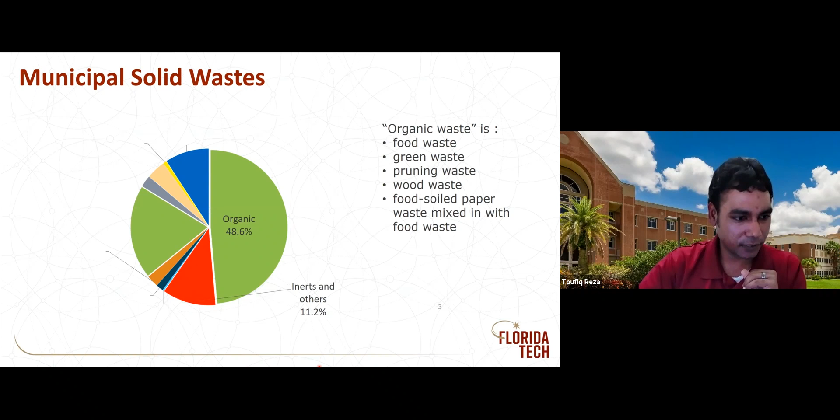The problem with municipal solid waste is it's heterogeneous. Think about it, my household waste from this week will be different than next week. When we're collecting it, it's very heterogeneous. An industry cannot be built based on a very heterogeneous, changing substance.

It has to be something consistent so we get a consistent product. It often comes with high water content. Usually municipal solid waste has poor mechanical dewaterability, high ash content, low bulk density, low friability—we'll come back to those later. It's also usually contaminated with organic and inorganic contaminants.

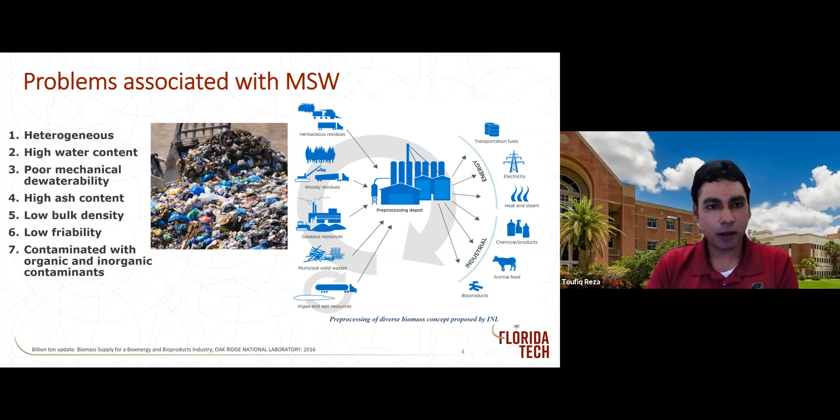Because it's heterogeneous, it's very difficult to have one solution for everything. There's no single process that solves all the municipal solid waste problems. Our approach is one way to go, but others are developing different ideas too. I'm not the only one working on municipal solid waste or organic waste—we've identified this as a serious problem, and many of us are proposing various solutions. This is just one solution we're proposing today.

So one solution: if I have municipal solid waste, companies like Republic Services or Waste Management truck it, and we can do something called the autoclave. These large-scale processes operate at 140 to 150 degrees Celsius, which melts the plastics and separates the large particles from the organic fractions.

The large particles can then go to the MRF, also known as Material Recovery Facility, where more than 300 of them operate in the US. Basically, they separate the recyclables—recyclable plastics, glasses, and papers—so we can recycle and reuse them. But there is evidently an organic fraction remaining.

One way to handle the organic fraction is through anaerobic digestion. We can produce biogas, which in the US is carbon dioxide and methane. Then we capture the carbon dioxide to get renewable natural gas, which we can inject into the natural gas pipeline or utilize otherwise.

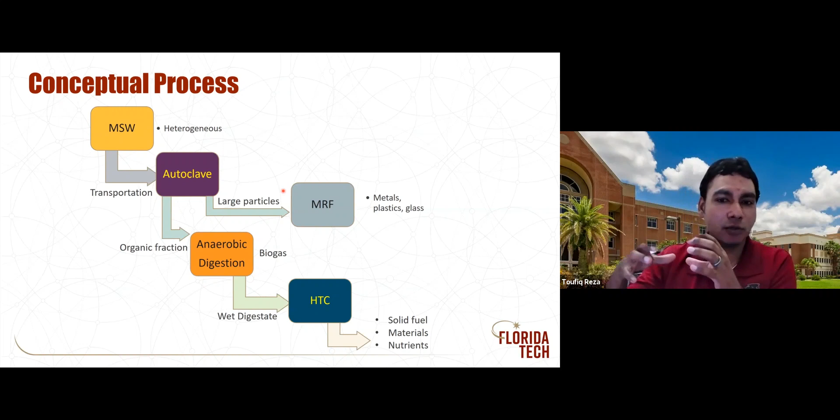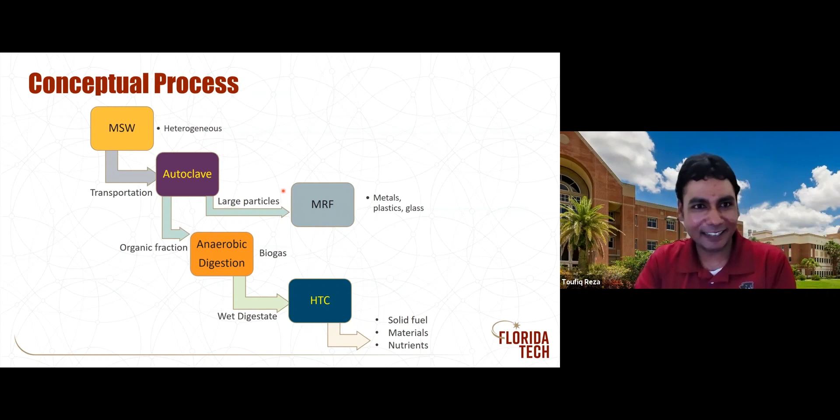I am not inventing the autoclave—it's already invented. Material recovery facilities already exist. Anaerobic digestion of organic waste has been established as well. So my research focuses on solving the last piece of the puzzle. I'll explain these processes a bit more and then introduce my research, starting with the steam autoclave.

So how it works is we bring the bags of municipal solid waste, and then it can go through a shredder if needed. The process I'm going to show you next doesn't actually need to go through a shredder. A shredder is a good idea to minimize the size, but it also adds to the cost.

Then it would go into an autoclave. Autoclaves usually run with saturated steam at pressure around 10 bars, and temperature about 140 to 150 degrees Celsius. After that, we collect the products, as you can see here, and the water vaporizes because it's 150 degree Celsius product coming out. Then we separate it into two fractions, and from there we can use the different products for different applications.

I just got off a phone with Hughes Energy Group last week, and based on UK technology, they are building 13 new autoclave plants in the US. They're already building one in New York City, and plan to expand to more than 50 in this decade. That is going to happen. We're going to see a lot of these autoclave facilities coming in, and this would allow us to reduce the load from landfills and utilize this material for other applications.

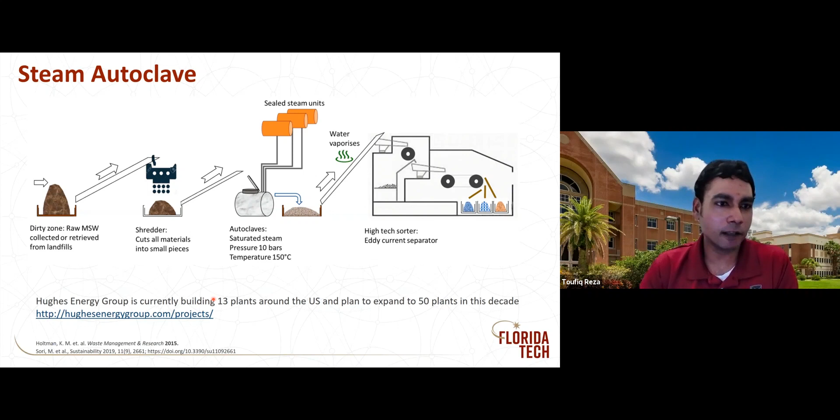So this is one process that is located at a pilot plant in the Department of Agricultural Research Station up at the West Coast, in the western areas, and this is a pilot scale. As you can see, the trash is coming in, and then it goes through an autoclave, and this is what the slurry looks like after the autoclave. It doesn't look that pretty, but...

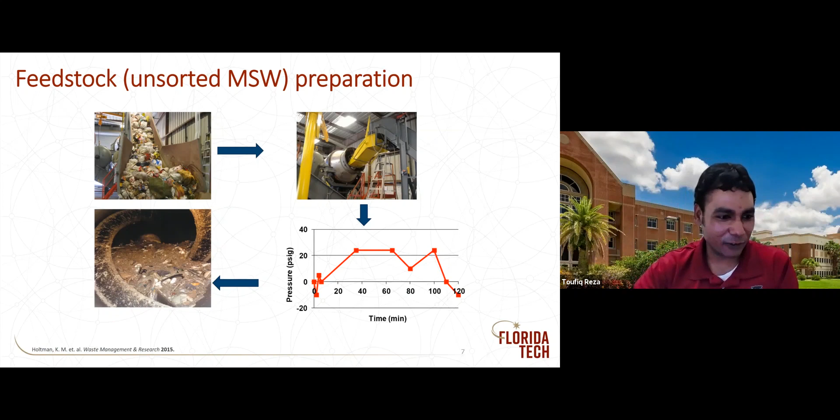...the product is amazing. If you look into the product, they collect it in two different fractions. You have a biogenic fraction, which they call MSW pulp, and we work with that as well. And this is a non-biogenic fraction, which as you can see has a lot of metals, plastics, papers, etc. So we could actually utilize it for the MRF.

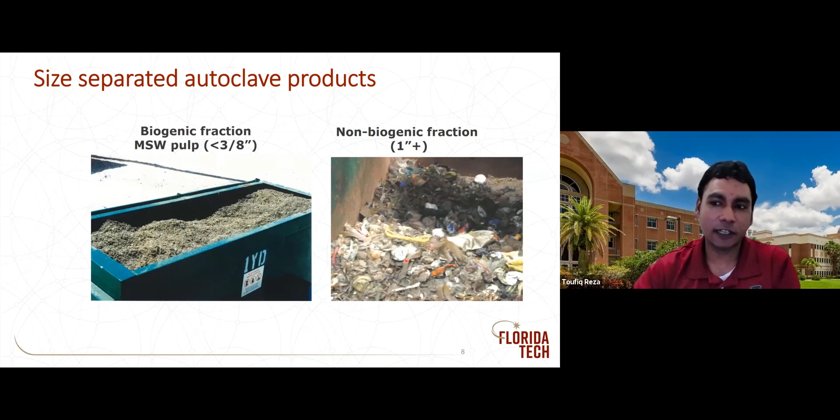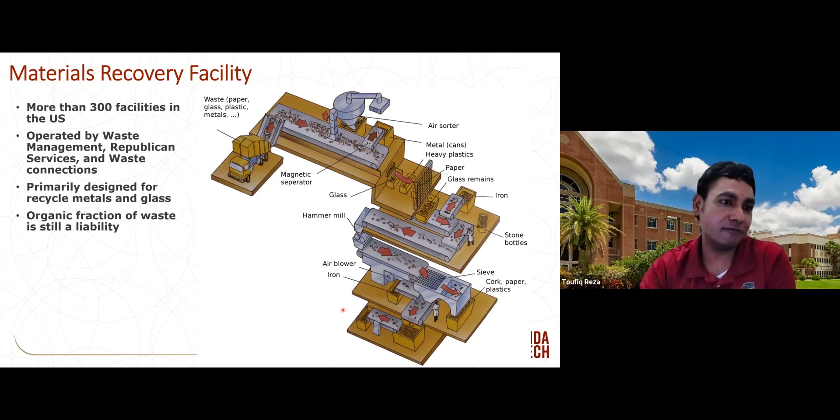But now what should we do with the pulp? We could try to sell it, whether to Georgia Pacific, so they can make paper towels or tissue paper out of it, or we can use it for other purposes. For example, we propose to use it for anaerobic digestion.

If you're not familiar with anaerobic digestion, it's a very good process to break down organic substances. This is a biological breakdown, with a maximum temperature of about 37 to 55 degrees Celsius depending on the feedstock, breaking down the carbon into methane and carbon dioxide.

The basic principle of anaerobic digestion is here. We have complex organic matter, and first we break down that organic matter. If you think about sugar, a glucose, we break down the sugar into acid. This process is called acidogenesis, where we make volatile fatty acids, for example acetic acid.

Then we go through acetogenesis, where these acids form, and then it goes through methanogenesis, where different kinds of bacteria convert the acids into methane and carbon dioxide. So depending on what kind of feedstock and how much carbon we have, we can produce methane and carbon dioxide. I'm not going to show you the results today.

We're still working on it, but we are trying to look for a way to capture carbon dioxide from biogas, so we have carbon capture from the biogas. Also, we have renewable natural gas that can be used.

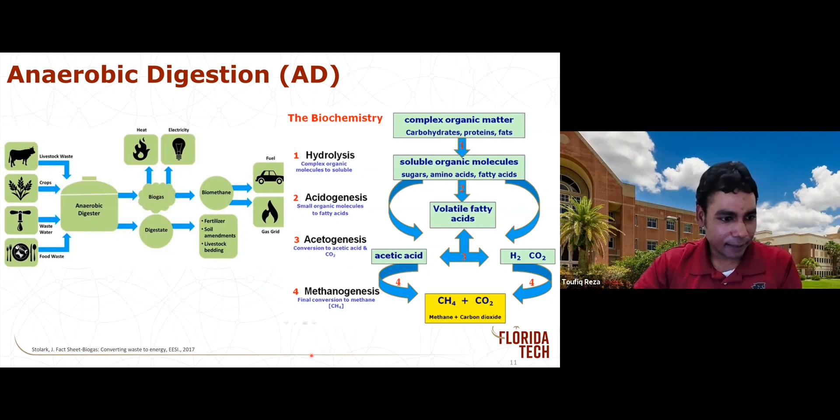So when we look into how the USDA pilot anaerobic digestion system works, as you see, we have the MSW pulp coming in, less than 3/8 inch grind, and then it goes into the receiving slope, then the reaction zone, and then the attached growth zone. This is how it looks.

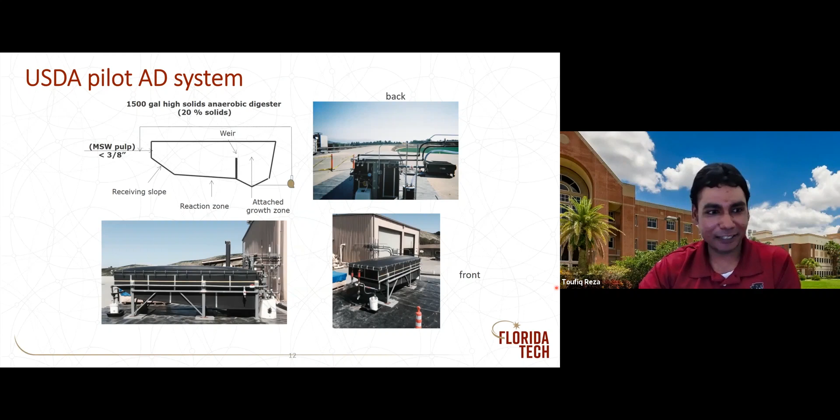It works great, and this is some of the results. This is Dr. Diana Franke—she was a postdoc at that time. Now she's left USDA and is working at a company in Atlanta. Anyway, this is what it looked like, and this is the solid product.

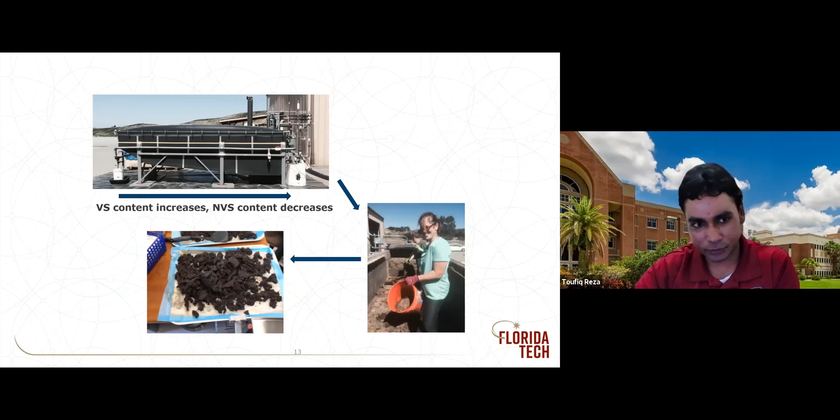So we're going to make biogas, and we can utilize it, but inevitably we are also going to make digestate. If we look into the mass and water balance—as chemical engineers, we love doing material and energy balance, it's our bread and butter—anything that comes in has to go out. So that's the thing when we look into the anaerobic digestion from USDA's pilot plant facility.

For 4,689 pounds of wet pulp, we need to add some water to facilitate pumping. We're going to have about 157,000 liters of methane, and another 40% would be carbon dioxide. But there would also be another 3,000 pounds of wet digestate.

And the USDA came to us and said, what can we do with the digestate? That brings us to the technology we're working on—what to do with the digestate. That's our hydrothermal carbonization process.

This is a little bit new, so I'm going to go a little deeper, because it is our process and I'm very proud of it. Also, it's probably a little new for many of you.

To look into hydrothermal processes, one thing we need to examine is water—specifically the thermodynamic properties of water at high temperature and high pressure. My good colleague at the University of Hohenheim, Dr. Andrea Kruse, wrote a great paper, 'Water as Magic Solvent for Biomass Conversion,' in 2015. I still refer to it.

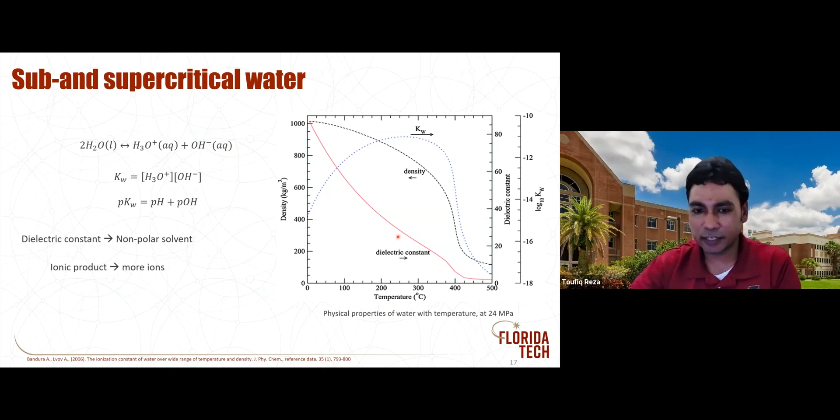We can just use water's property. We don't have to use any acids or bases or other harsh chemicals. We can just use temperature and pressure to convert this kind of wet feedstock into other materials. And this is what a hydrothermal carbonization process is about.

If we maintain our temperature between 180 to 260 degrees Celsius, we see a lot of carbon formation, a solid carbon formation. That's what we call hydrothermal carbonization, if my desired product is indeed the solid. But if we go beyond 260 degrees Celsius, but before the critical point, we start to see more of a liquid product. This is called hydrothermal liquefaction.

There are several technologies being developed around in Japan, in Europe, and in the US as well, where we are trying to hydrothermally liquefy solid waste, the sewage sludge, and try to upgrade that oil into a liquid fuel. In this case, we are going to say it is a sustainable aviation fuel, and it did work. I'm not going to go into that, this is another part of study. So we're going to focus on hydrothermal carbonization.

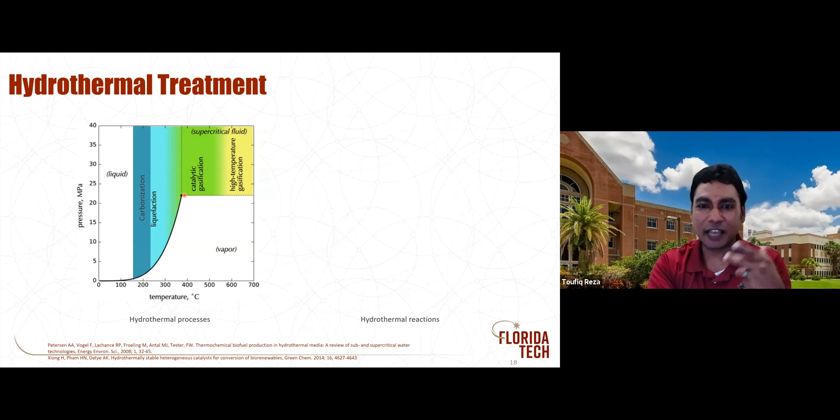So if your goal is to produce hydrogen, and if you are okay with 22.4 megapascal pressure and 400 degrees Celsius, the reaction is very quick, and it usually happens. But there are several issues. For example, at that supercritical condition, if you have any amount of halogens, it starts to corrode very, very quickly. So this is one thing we have found.

In terms of reactions, I'm going to skip it very quickly, but on the shaded side, we have the liquid and the vapor phase. If I have the vapor phase, I'm going to have gas phase reforming and pyrolysis that you might be more familiar with. But on the liquid side, I would have dehydration, hydrolysis, aqueous phase reforming, all the way to gasification.

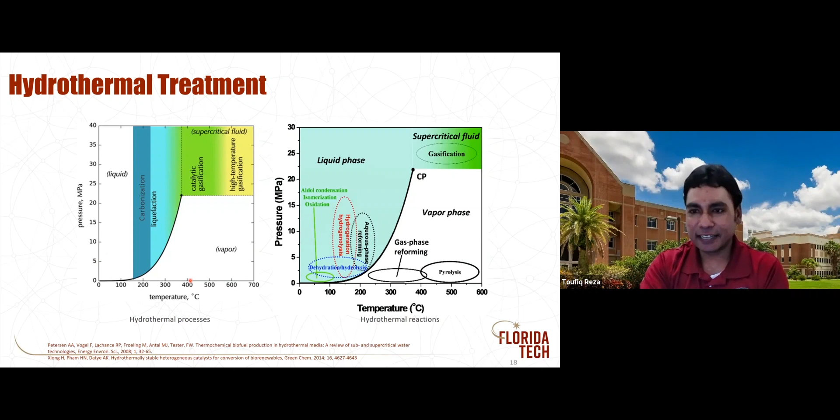Now, what are the advantages of hydrothermal carbonization if you're talking about a solid product? The hydrothermal carbonization is a wet process. We don't have to dry the biomass. This is very advantageous for us because usually this kind of wet waste can have more than 95% of water. Evaporating it or drying it off is an extremely energy intensive process. So we don't have to do that.

It can accept numerous biomass types, so we can have only one reactor setup, and then different biomass coming in. One of my research areas is what we call co-hydrothermal carbonization, where we actually blend different biomass together and see how they affect each other. It can also convert waste to energy and materials, and I'll try to cover both of them. Let's see how I do with the time.

It is a non-catalytic process. Water itself, because of its thermodynamic properties, we are going to utilize it. We don't have to use a catalytic process, but there are technologies nowadays being built as catalytic hydrothermal liquefaction or catalytic hydrothermal carbonization if we want to make a final product out of it. But there are other issues as well, like how to recycle the catalyst, how to regenerate the catalyst.

Depending on what we have, we found that the reaction is slightly exothermic. Now, it being slightly exothermic is a good thing. Too exothermic means, in chemical engineering, we call it a runaway reaction. Anything that is combustible, we have to design against that runaway reaction, make sure that everything is cooled down for process safety perspective. Slightly exothermic is good, meaning the reaction itself produces heat. So if we can make that process in such a way that we are utilizing the heat effectively, there is a possibility that we probably don't need to add additional heat when the process is running at a steady state.

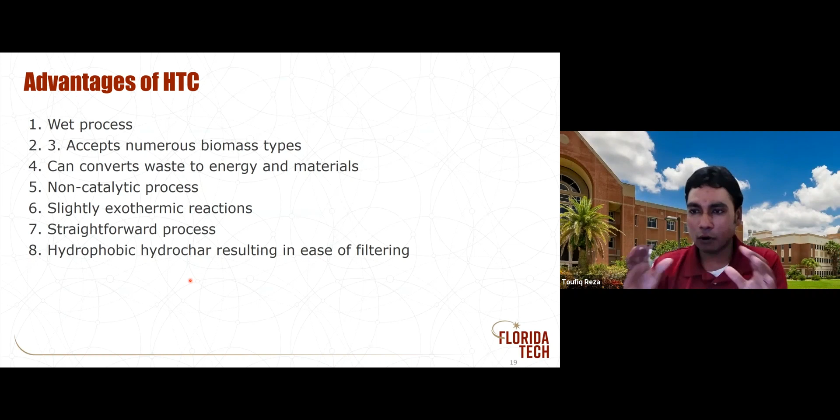Again, as I'm saying, this hydrothermal carbonization process is basically a pressure cooker. This is all I'm saying in a very technical way. It's a pressure cooker. You put everything in, like my meat and everything, put the lid on, have a weight to it, and then cook it. We know that pressure cooker cooks it faster, and I know why, because it is pressurized. So we just go beyond that.

We have a couple of fancy ones, if you can think of pressure cookers, which could go up until 500 degrees Celsius, 5,000 PSI. A little more robust, a little more controllable.

In terms of temperature, as we already talked about, it is about 180 to 260, 280 degrees Celsius. Depending on what we want, the residence time can vary from 1 minute to 12 hours. The higher the temperature, the lower the residence time. As you remember, the kinetics works in this way: the higher the temperature, the lower the residence time. And we do not add any pressure - this is an autogenous pressure during the reaction.

So we go through the biomass, in this case digestate, and biomass already has water. There are a couple of products coming out. There will be a solid char coming out - this is what we call the hydrochar. This is how it looks - it's black, it's dark. But there are some gases coming out too, probably around 5% of the carbon would convert to gas. One of the reactions for the hydrothermal reaction is decarboxylation, where we could see some carbon dioxide coming out. We'll have water and platform chemicals, in sugars and acids - that is another product or byproduct that we are looking into as well.

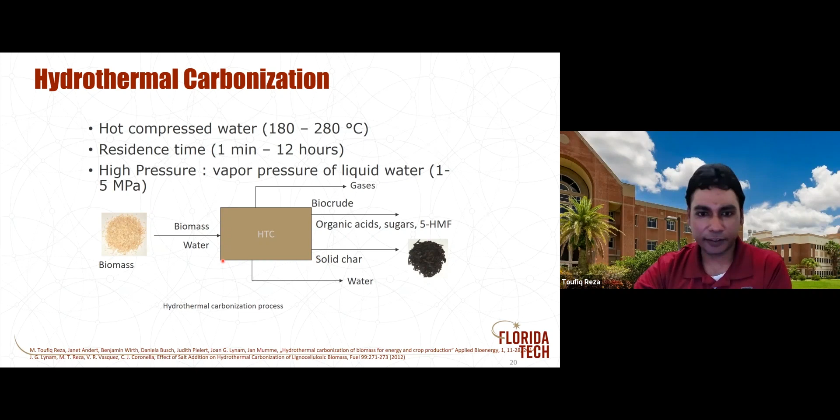I'm not going to spend too much time on it, but this is to construct this reaction mechanism. It cost us, several groups, more than 6 years to actually construct how it is happening. In a nutshell, the biomass would go into hydrolysis, where water will be consumed. It breaks it down into different monomers, which would then go into dehydration, and into a couple of other reactions we call condensation, polymerization, aromatization. In every case, we see some dehydration product coming out, and also some decarboxylation product coming out. So altogether, we start with the biomass, which ends up with a more carbonated, defined product.

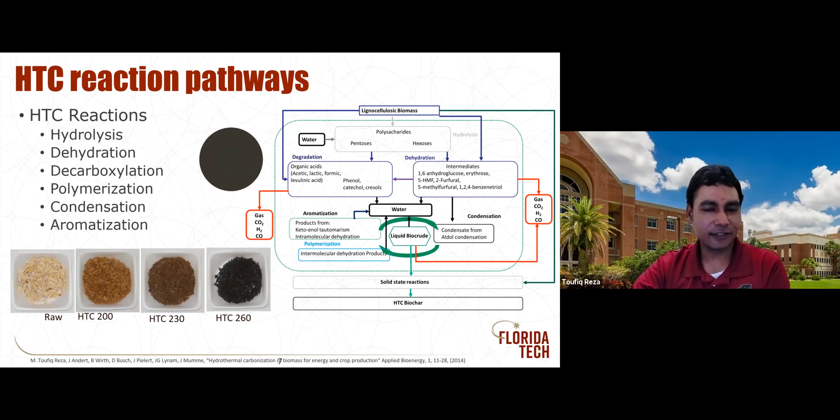If we look into hydrothermal char, this is how it would look chemically - we usually have a hydrophobic core, and a hydrophilic shell. The hydrophilic part has more functional groups. And when I see the material property or material application of this kind of solid char, the functionality is a very big factor. But in terms of fuel, I would need a lot of carbon and a lot of hydrogen, because those are the ones which would actually reflect my fuel value.

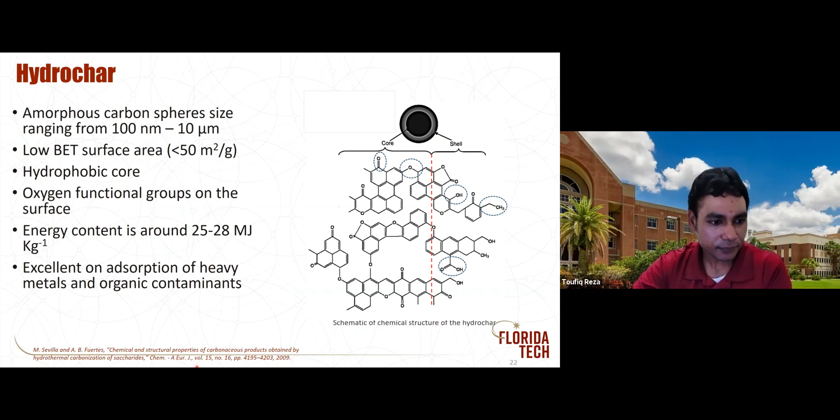Now let's come into the application finally - what can we do with it? In terms of application, if I want to make a good solid fuel, there are a couple of things I need to do. My good solid fuel should have a high energy density. Unfortunately, biomass doesn't have a good high energy density - it is very light. It should have good grindability. I should press it very quickly, because if I want to use it in an existing power plant or a boiler, it has to be very fine so that we can burn it very quickly.

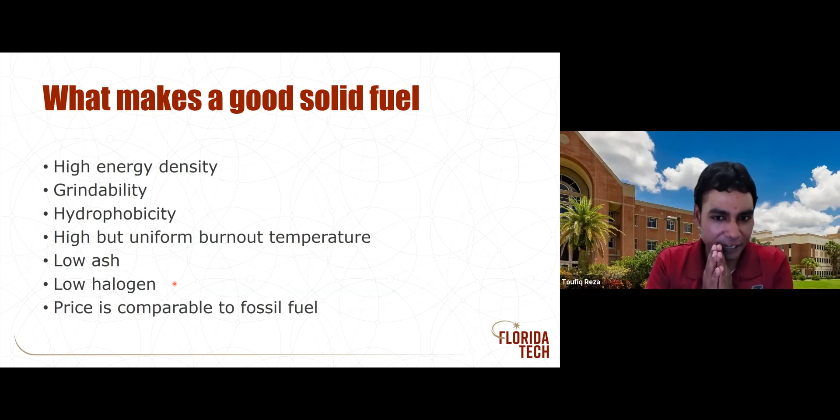It's better if we have hydrophobicity, or we increase the hydrophobicity, because the more it's hydrophobic, the better the storage ability would be. We want to maintain a high but uniform burnout temperature - so when we burn it, we want it to be burned at a very narrow temperature range, and we want it to burn very efficiently as well.

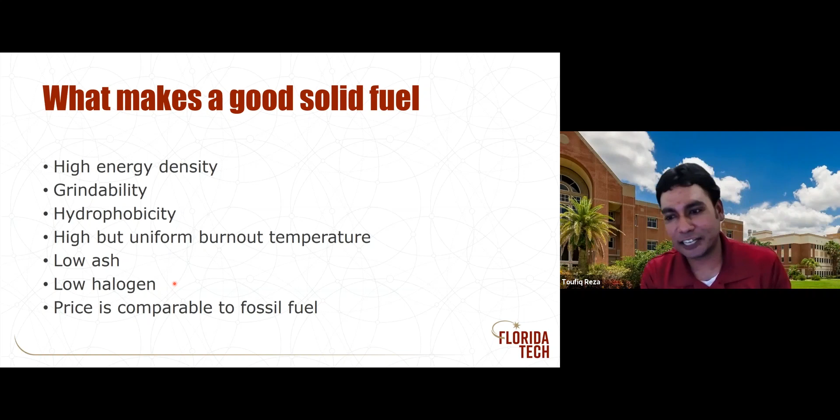So the last thing we want is co-feeding, for example having two different feeds, one with coal and one with natural gas with this product, since they burn at separate temperatures, that would not be feasible. I would want low ash, because I don't want to handle too much bottom ash or fly ash. I would like to have fuel with very low halogen compounds, because we want to avoid corrosion. And of course, we have to compete with the price of fossil fuel, price of coal, and price of natural gas. Okay, now how are we doing with that?

We can do elemental analysis, and then we can draw something called a Van Krevelen diagram, which is basically plotting the atomic oxygen-carbon ratio against the atomic hydrogen-carbon ratio. My ideal fuel will have a very low oxygen and very high hydrogen to carbon ratio, so a very good fuel should be very close to the origin. The farther it is from the origin, the worse the fuel value would be.

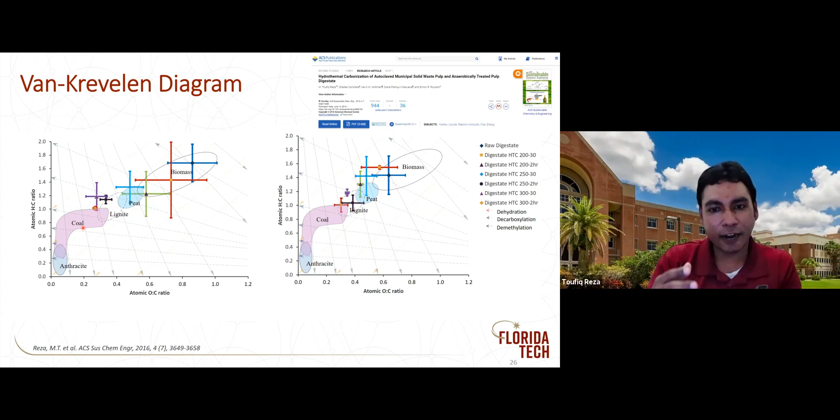We see that biomass is actually very far away. Once we do the hydrothermal treatment, we are bringing it all the way to the coal region. So from that elemental analysis, we see that we are making a product similar to coal.

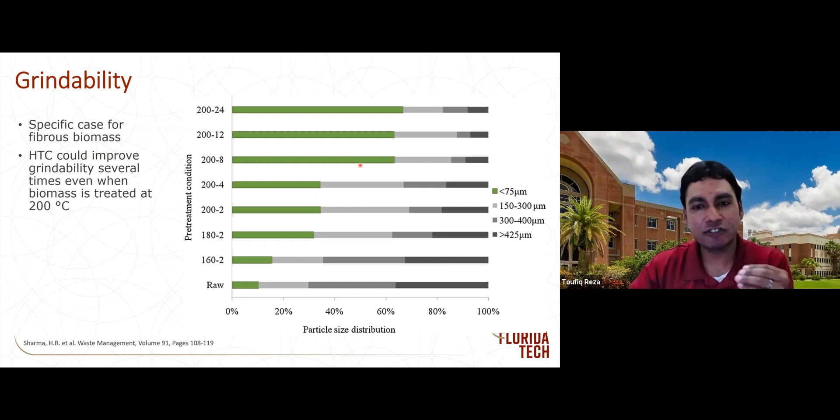Very nice. How does it grind? From here you see that the raw biomass doesn't grind really well. So we put it into the grinder with a similar amount of power to grind it, and you see most of it is more than 425 micrometers, so it doesn't really grind well. But with hydrothermal treatment, we started to see more and more fine powder, so it would actually take less energy to grind it.

And so does my energy density. Energy density is basically multiplying the mass density with the higher heating value or energy content of the product. So I could see that my energy value increases, my energy density has increased, and my grindability increases as well. Now let's take a look at the hydrophobicity.

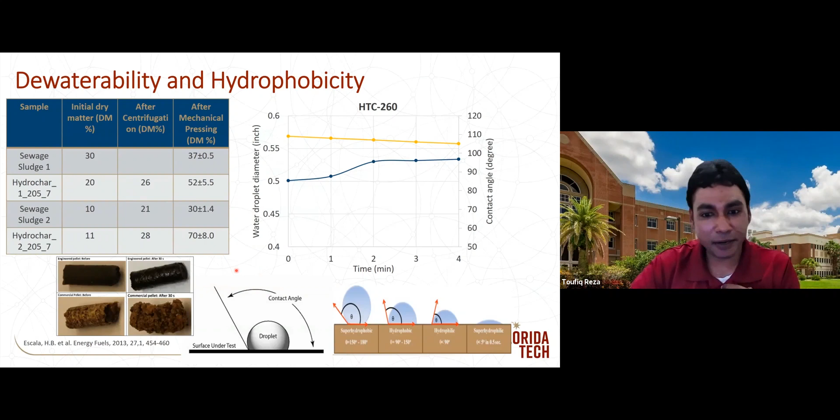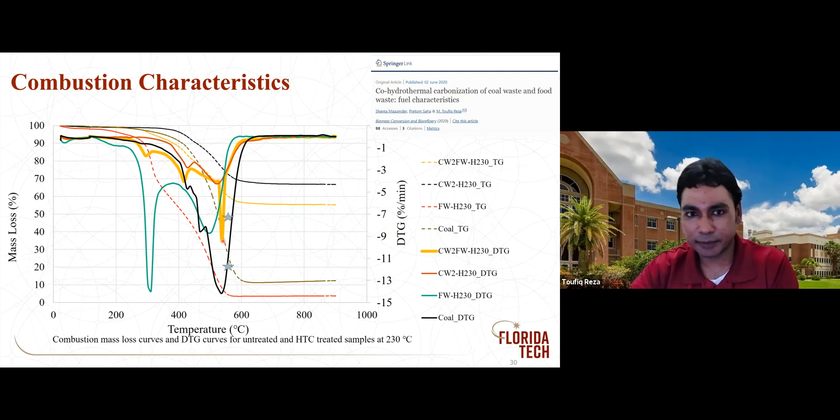So if we want to do a co-feeding, I do not want to mix the raw food waste with my coal, because if I mix it and put it into a boiler, all the food waste will be burned first, and then it will burn the coal. But if we do a hydrothermal treatment, we see that this actually burns more similar to coal. So that's an encouraging thing for us.

Now, we haven't talked about what happened to our process liquid. This is what we are still working on. But we found that our process liquid, depending on what kind of feedstock we use, can have a high amount of total organic carbon, and a good high amount of total nitrogen. So if I have a lot of nitrogen-containing feedstock, a lot of protein, I could end up with a good amount of nitrogen in the process liquid.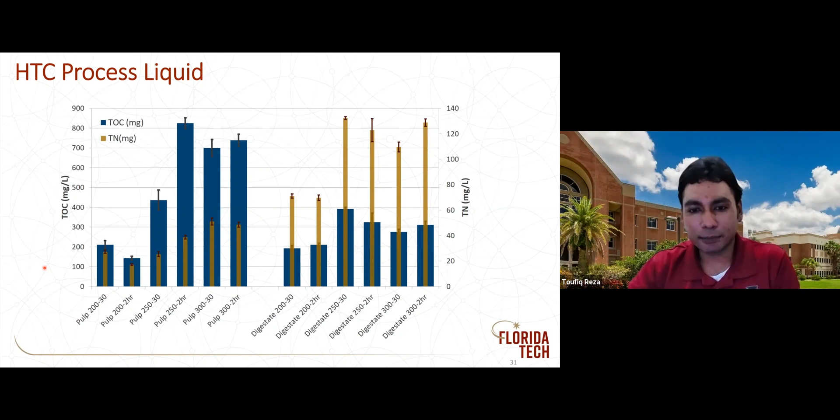Now, a good amount of nitrogen is a good thing for process liquid if we want to use it for nutrient recovery. This is what we're working on. Or if we want to feed it to anaerobic digestion, to see whether they can further break it down. These are a couple of researches currently going on that I should be able to tell you more about probably a year or so from now.

But in terms of the inorganic leaching from biomass, we see we do not have that much of halogens, but in terms of others, we see a good amount of calcium, a good amount of iron that still remains on the hydrochar.

One relevant thing we studied, might not be that relevant to municipal solid waste, but relevant to sewage sludge or dairy manure, is different kinds of hormones and antibiotics, and what would happen to them. We found this with estradiol, which is basically an active ingredient of the birth control pill. If it remains there, the hydrothermal treatment would actually try to degrade it. And with the presence of glucose, the acidity, we can go up until 97% of degradation.

In terms of oxytetracycline, a very common antibiotic, we could see about 70 to 90% of degradation. So this is encouraging, might not be relevant to municipal solid waste, but it is relevant.

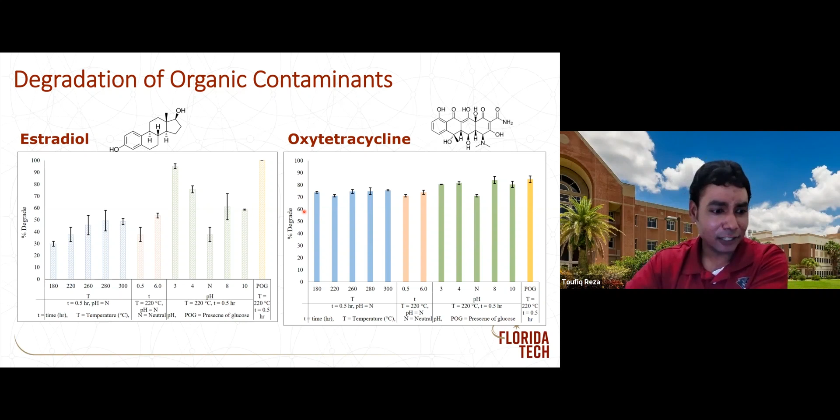Now, the question is, I think I'm running out of time, so I'm going to try to go a little fast. The big question is, how much would it cost? We did a study for the Ohio Coal Development Office, and they wanted us to test this technology to see whether we can actually co-feed coal waste and food waste together in a conventional power plant. So this is a conceptual process design over here, with the continuous process design.

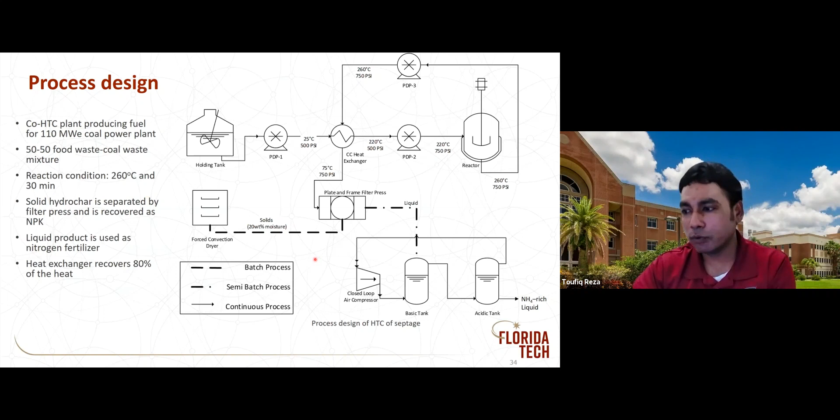We designed it with a reaction temperature of 260 degrees Celsius, and we are trying to separate the nutrients out of it as well. We tested two different scenarios where we could do the process at a coal mine site where I have the coal waste, or we could do it at a power plant site. In both cases, the selling price was about $72 to $77 per ton.

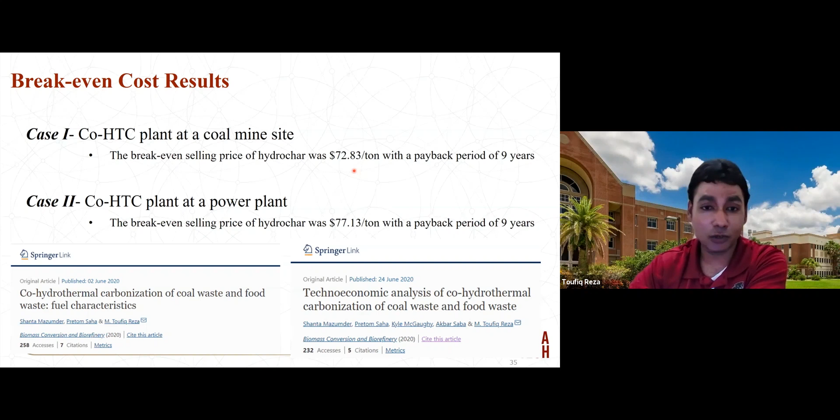Remember, the bituminous coal is actually sold around $55 to $70 per ton. So we are making good progress, but we still need to go somewhere.

But in terms of if we increase the plant size, we actually see that the break-even cost is getting lower, and we could go down to about $50, but our hydrochar production and the plant size need to be higher. The problem is whether we will have enough food waste to work with, and we will have to deal with the larger capital investment.

This is something we need to actually consider, not just with a funding agency but also with companies like Hughes Energy. We did a sensitivity analysis and found that several parameters, including the price of the feedstock, are very sensitive to our economics, as is the travel distance. This is an enormous factor, like how far food waste can travel, and how far the product needs to travel as well. This is something we are looking into and will see where it goes.

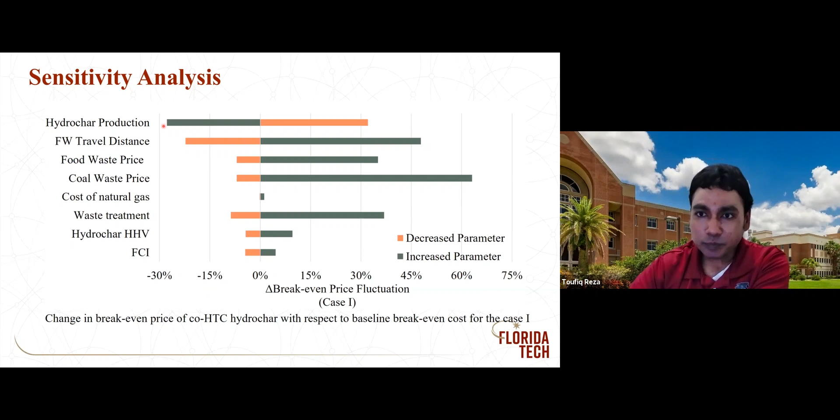Right, so it's 12:50. I have a couple of slides and then I am going to stop. Jillian, I'm very sorry, I'm running out of time.

Beside the waste, as you see, we are making good solid fuel. But beside that, one of our goals is to look into adsorbent material. Here we are looking into different kinds of adsorbent material. One of our projects is looking into absorbing harmful algal bloom, and the other project we are looking into is hydrogen storage.

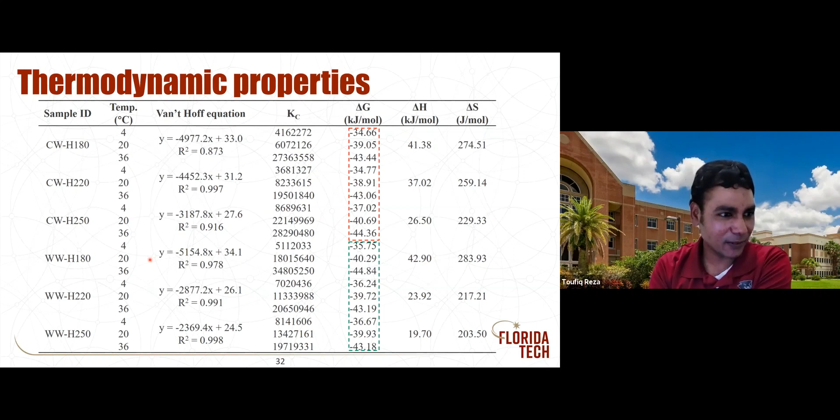So I'm going to skip this whole part and look into what our next plan is. Hydrogen storage really works, I wish I had enough time to go into it.

After we capture the carbon dioxide, I want to collaborate with my colleagues from Ohio State University. They are synthetically manufacturing microorganisms which would take carbon dioxide and sugars and make high-value chemicals, for example ethylene and some other chemicals that can be made. This is what we are working on, and hopefully next time we can give you more updates on that.

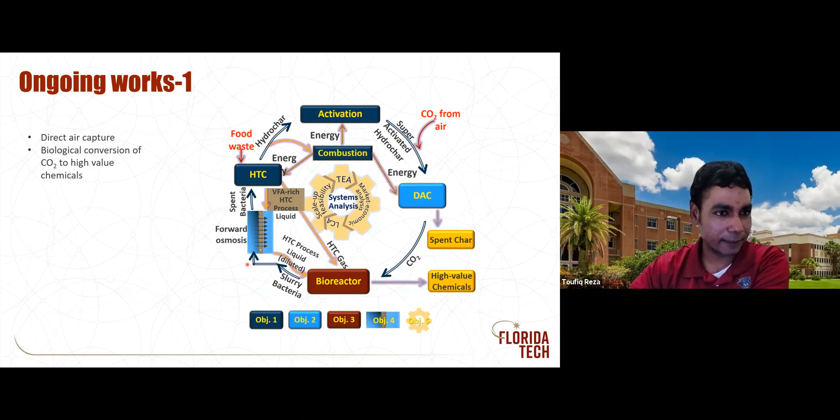The other thing we are working on: we just got funding from USDA to look into this kind of hydrothermal process to mitigate nutrient pollution from animal waste, and also to capture harmful algal bloom from water as well. We are going to work on that, and the preliminary results are very encouraging.

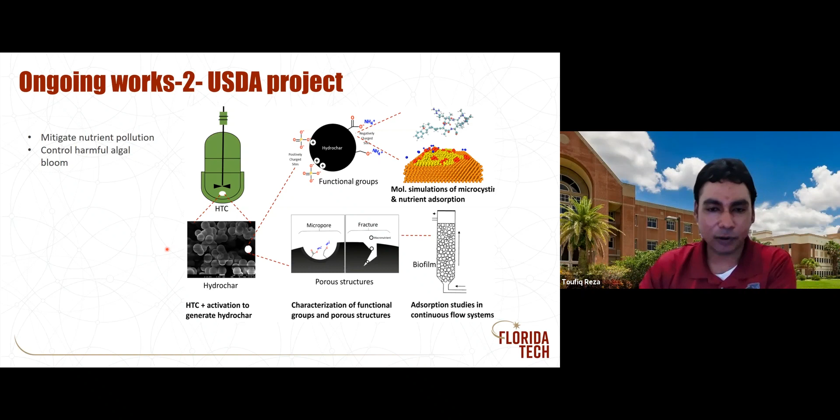So anyway, I get to conclude now. I'm sorry, I took a little more time. The conclusion is that biowaste is a huge source of energy and material. When I see biowaste, I don't see a problem, I see a challenge that we can solve, and it is a huge resource for us. It is available everywhere, but the problem again is that it is heterogeneous, moist, and unstable.

In my opinion, we cannot have only one magic process that solves all sorts of biowaste problems. We have to go through multi-step processing. We have to work hand in hand with other existing facilities and new facilities, and work together to find a solution that is relevant to the specific waste.

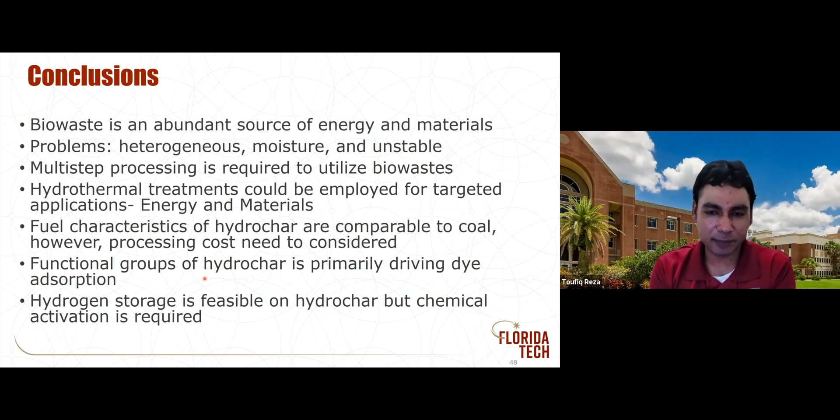We see that the fuel characteristics of hydrochar are comparable to coal, but the processing cost might need to be considered. This is what we didn't talk about much, but we are working on hydrogen storage with this material, and it is working. Probably next time I'll have more results.